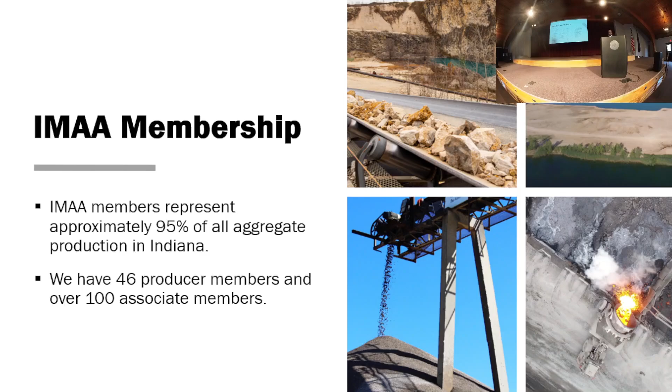We've had a good year in 2024. I've mentioned this previously this week that we had record attendance for everything that we did in 2024. Let's give yourselves a round of applause for that.

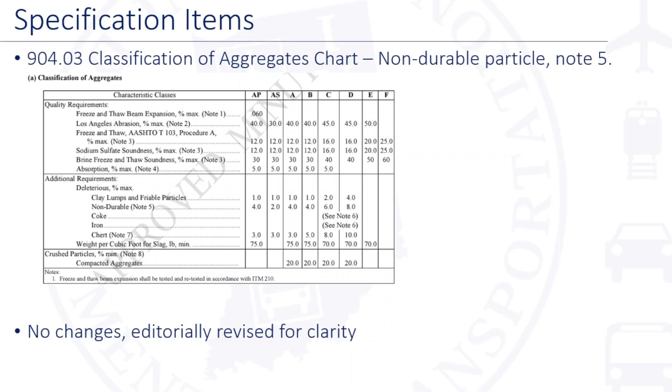On to some aggregate items. We made an editorial change to our classification of aggregates chart in 904.03. One of the notes, specifically note number 5, deals with non-durable particles. There was a long list of things in there, and we found there were different interpretations of this. In reviewing it, we thought breaking it up into A, B, and C would help clarify the intent. So that's the change we made there.

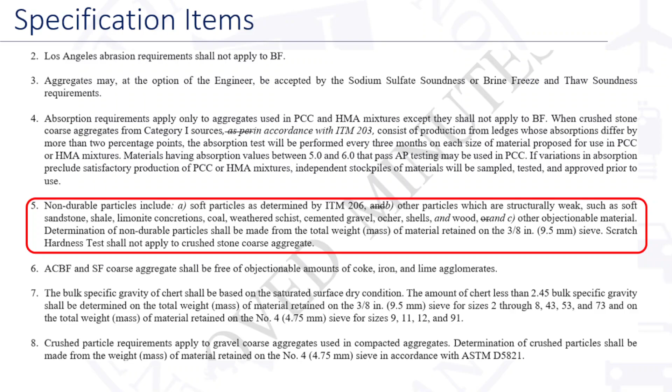That should be coming up here in September. INDOT is releasing a new standard specifications book that will apply to lettings September 1st of 2025 going forward, otherwise called the 2026 spec book. This change will certainly be in that spec book. I don't know if we made it a provision in the interim.

A couple other items here - like I said, we're going to bounce all over. Proof rolling, this was something our geotech department wanted to update, so they provided some clarification. That's in 203.26. I believe it has to do with the number of passes and stuff, but it's been a while since I looked at it, and geotech's not my background, so I just had to take their word for it.

Subgrade treatment - we used to have about 7 or 8 different types. We've looked at them, and geotech wanted to eliminate a few to reduce the number of options. So they eliminated 1D, 4, and 4A. Those were either seldomly used or very similar to other options being used. So these have been deleted.

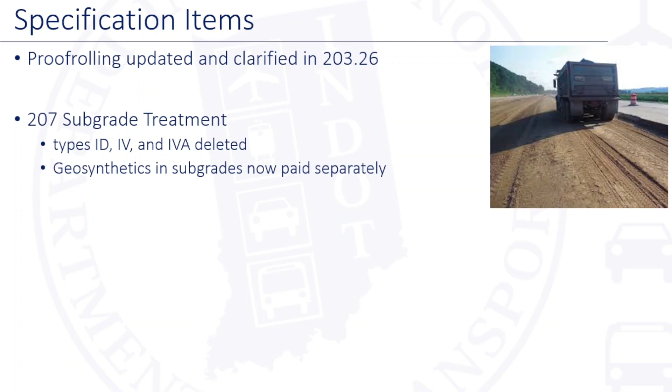Geosynthetics was something they also wanted to change up and now pay for that separately. It used to be included in the cost of the subgrade treatment when it was required. Now, when it's required, we'll go ahead and pay separately for it. So there should be pay items in those contracts that it applies to.

301 and 303, which is the aggregate base and aggregate pavement shoulder sections, had some additional details provided for aggregate compaction and construction, as well as clarification on moisture content. I think they want to shoot for between 4 and 7%, as opposed to running a bunch of proctors and getting optimal moisture and things like that.

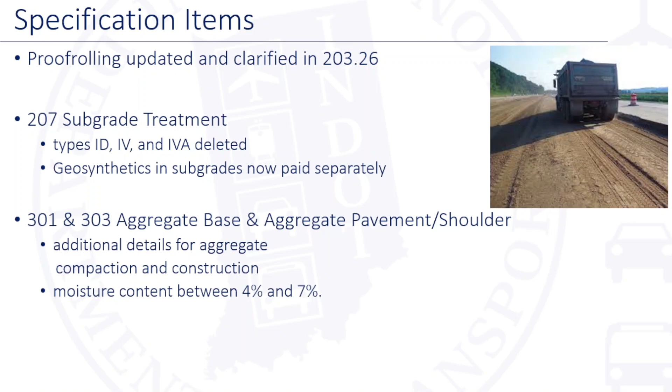Concrete pavement recycling and used as aggregate. This is something that's come up over the past couple of years. Various folks get inquiries from the public about general green type initiatives. Hey, what's the department doing? One of the ones we see a lot is, well, what about all this concrete pavement?

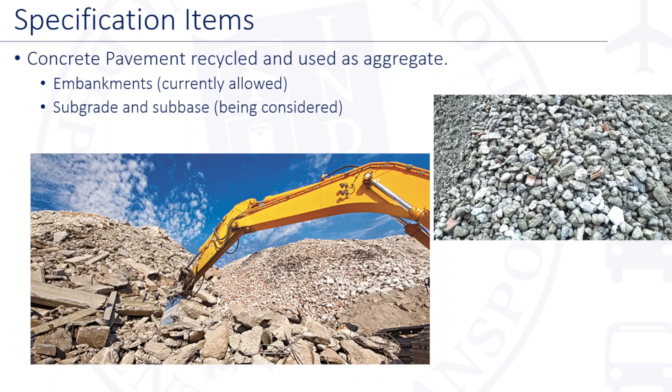INDOT has allowed it. The specifications currently allow it to be used in embankments. This would be below the level of your under drains, somewhere in the 203 section. We also have a small working committee looking at perhaps getting it into subgrade and subbase. Not sure there's a huge demand for this, but it's something we felt an obligation to look at, going forward with some of the different initiatives. We at least wanted to look at it and see if there's opportunity.

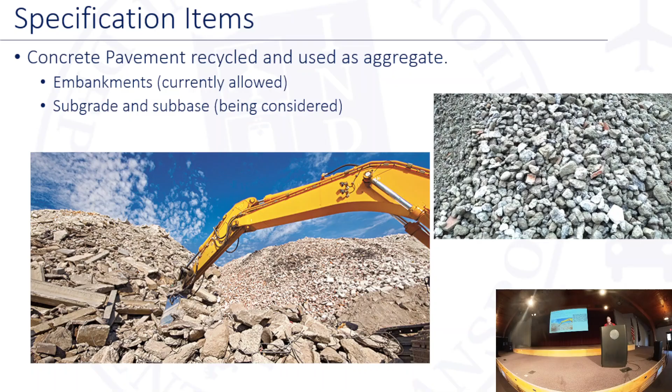So there is a group working on it. I'll admit it's not probably first on anyone's list of things to do, but we are meeting periodically and talking about it. So we may or may not end up getting it into subgrades and subbases, but it's at least being discussed.

Some of these rebar items now coming up, I'm going to try to move a little quicker since most of you don't deal with too much rebar. We did allow 706 as an addition. Rebar right now is in accordance with ASTM A615, that's your standard steel rebar. 706 is just a slightly different chemistry. We went ahead and added that as well, so coming forward here in the future, if there does happen to be some steel shortages, there's another option that contractors can look at to keep things moving.

706 is considered weldable. However, INDOT is not allowing welding on 706 rebar. All rebar, whether it's 615 or 706, still needs to be tied. But we do have a spec change that will allow either one of those to be used.

With various updates to the AASHTO design specifications, it was felt that 32 is not sufficient for all scenarios they're looking at, so it's now 64 bar diameters. But we really want the designers, they're aware of this, our design manual talks about it, it really needs to be shown on the plans. If it's shown on the plans, then that's what you do. If not, and there's no other guidance, then the fallback was always 32 bar diameters.

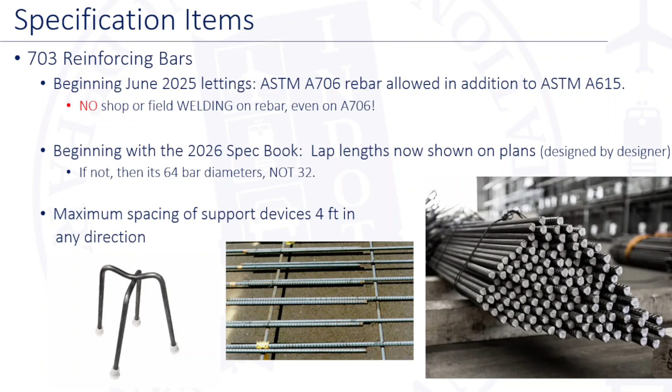Now it's 64. The maximum spacing of support devices we changed, again, this is coming up in September. In order to provide a little more rigidity and stiffness to the mats, support devices should be no more than 4 feet apart in any direction. So it may end up being a few more support devices used, but hopefully it gives us a little more rigidity to the mats. The steel will stay where it's supposed to, and we'll be able to maintain the clear covers to the top and the bottom like we're supposed to.

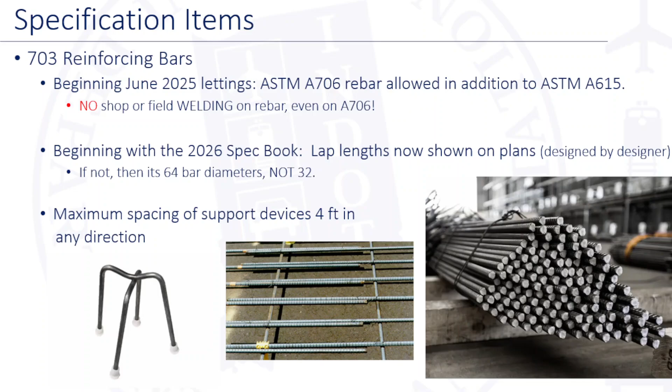MSE wall panels, this has been an issue that's come up here, unfortunately, more frequently the last couple of years. Specifications call for a couple of cores to be taken. Just want to make sure everybody knows these are 4-inch inside diameter, so the core itself needs to be 4 inches, not the core bit. If the core bit is 4 inches, the resulting core is something less, and that doesn't work when we go to do the compression testing on it.

Yes, we will get a value, but if it's real close to the minimum acceptable, and the core is a little smaller, you get a lot of uncertainty. Well, if it would have been the proper size, is this acceptable or not?

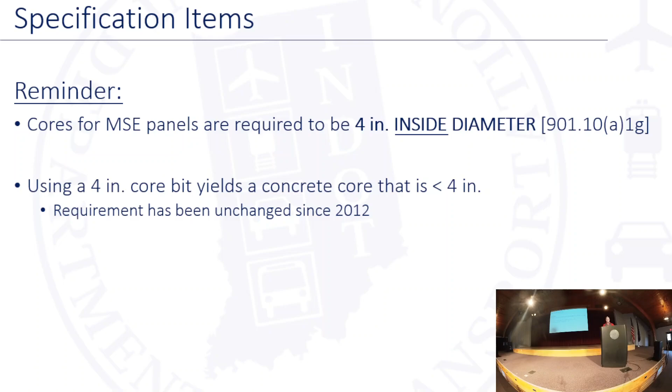So just want to emphasize, hey, it's 4-inch inside diameter, so that's probably equates to about a 4 1/4 core bit is what's needed for that. A few other spec items here.

738 are polymeric or epoxy bridge deck overlay. That's what's in the top picture there. Basically, it's slather some epoxy on a bridge deck, cast some aggregate in it, put another layer of epoxy, then another layer of aggregate. Our asset management teams, our bridge maintenance is using this a lot to try to help extend the life of bridges before we get into rigid overlays.

If you have one of these in your contract, I just encourage you, please read that provision. We've had about 7 different versions of this provision over the last 5 years, so even though you've done one a couple years ago, please read what's in your current contract, because there may be slight changes from the last one you did.

Box culverts, there's been a change, a new option. Sometimes waterproofing membrane will be required. If so, there will be a pay item in the contract. And what that entails, instead of like the picture shows, where they're basically just putting that wrap on the joints, it would be the entire structure gets wrapped.

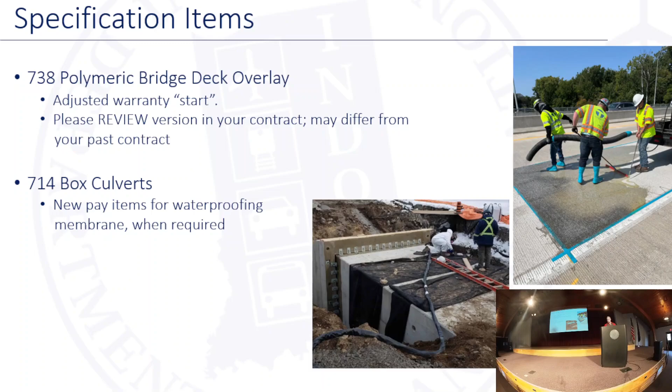Again, if this is required, some districts were requiring it, and there was just some inconsistency throughout the state. We went ahead and got a specification created on it just so we could have consistency throughout the state, as well as when it ends up being selected for use by design.

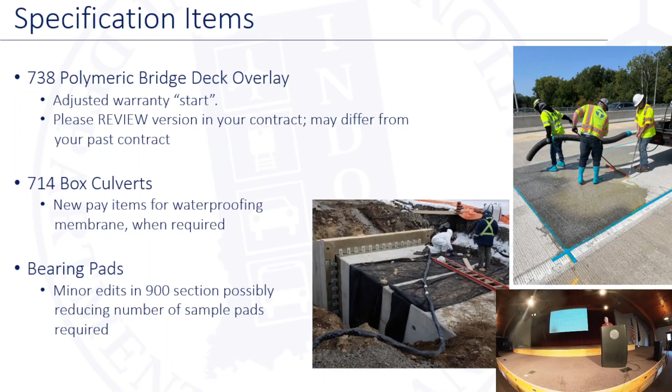Bearing pads, we'll skip over that one now in the interest of time. Basically, we made a change dealing with the number of samples we need, we made a slight tweak on that. So hopefully it may, in some cases, reduce the number of samples that the bearing manufacturer is required to send to INDOT.

Build America, Buy America has been a hot topic here in 2025. Those who may not be aware, the manufactured products waiver was terminated in the Federal Register January 14th. What this means is we've always had a certification that was required for steel and iron products. Steel and iron, you had to fill out certifications since probably about 1985 or thereabouts. Your steel and iron needed to be, I think, made, milled, manufactured within the United States. So that's always been there.

A few years ago with the IIJA bill, that came out and they added things called construction materials. So construction materials, they wanted also to be primarily manufactured in the United States, and they gave a list, optical glass, lumber, a handful of other things. So those were now requiring a certification as well.

Two years ago, for manufactured products, Federal Highway had a waiver for these. So if it was a manufactured product, well, that can be made wherever. Not anymore. Effective with our October letting, the manufactured products are also going to have to be some percentage of them made, manufactured in the United States, and there'll be a certification for that. There'll be some additional impacts coming up with the October '26 letting. I think it deals with the percentage of the components that need to actually be manufactured in the States, but there'll be more information forthcoming on that once we receive more information.

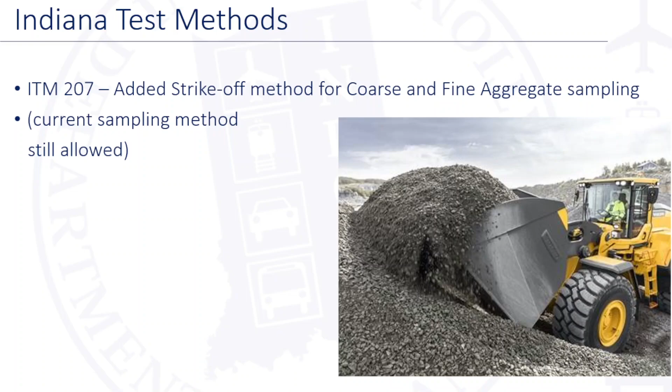Going on to Indiana test methods here real quick. I think I just have one of these in my presentation that we changed. ITM 207, we added a strike-off method for coarse and fine aggregate sampling. The current sampling method is still allowed, so with the addition of this, that gives everybody options. You can sample it in one of two ways.

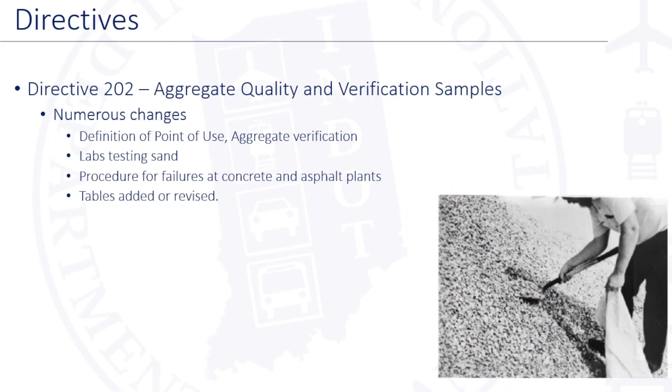And in Directive 202, aggregate quality and verification samples, we made some changes here. We understand there was some inconsistency with maybe how point of use and other things were taken. So we've tried to put some clarification and clean that up, as well as for labs testing sand. Tried to clean up and better define procedures when there's failures with aggregate at concrete and asphalt plants, as far as going back to the source and things like that. So Directive 202 has a fair number of changes here that we hope are going to be some clarification for consistency there. And that brings me to the end of my presentation here.

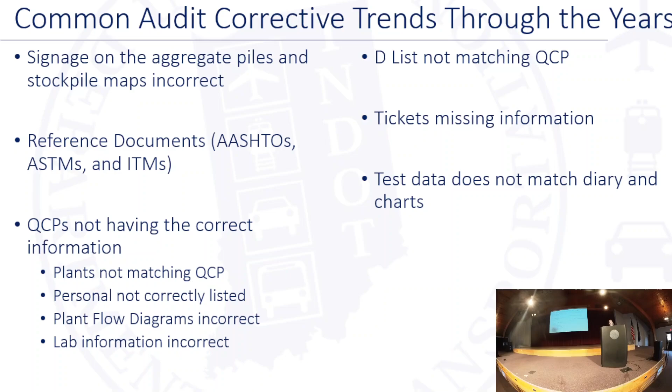5-point moving average trend not noted in the diary or the math was incorrect. With your programs, once in a while your 5-point moving average is not a 5-point moving average, it's actually like a 3-point moving average. So when you guys do your charts, you want to make sure it's a 5-point moving average. We also noticed that the trends 7 up, 7 down are not being noted in the diaries as well.

Missing deleterious tests or frequencies. Again, that's a big one that we've been seeing. I do know some of the programs, like Stonemont, Windrock, if you have a 0 on your deleterious, it does not report it. So you want to make sure when you do your test that it gets reported. Missing startup, normal, and loadout frequencies. Yes, we all know we're human, we miss our frequencies, but we've been seeing that.

Key personnel changes not in diary. Again, if you had a boss that decided to leave or you had a tech leave, just note it in your diaries. Compliance rates being below 95% or standard deviation above 5.0. Again, this is one of the bigger ones that we do see once in a while, and that actually hurts you just as much, because if you have 95% or below, we will commercialize your stockpiles, so you lose a lot of money in that part for being state.

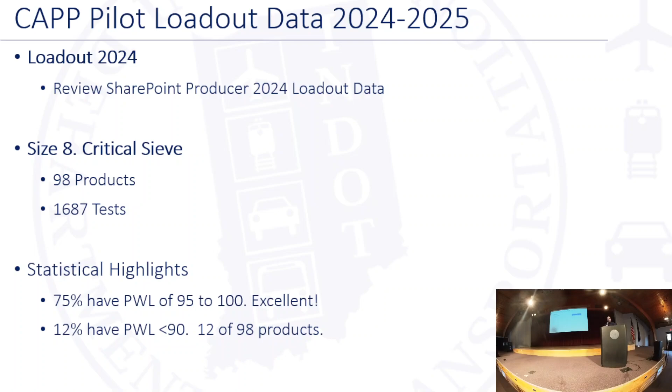What we really want to focus on, and I think what we learned through this, is a lot of products, a lot of producers are already hitting what we're asking for, and we want to talk about the ones that are below that line, and that's really what we're going to focus on, is what can we do to get those ones that are below that line up above that line, and how can we do that?

So those are a lot of things I already said. We found the data entry time hopefully was not a burden on folks that did that, so I want to thank everybody for doing that in our SharePoint spreadsheets.

Real quickly, I have the size 11. Pretty similar, a little better. I think all of you would agree 11s are probably a little easier to handle and keep in grade just by the nature of the size. We had 62 of those, and I think a little under 1,000 tests, but again, pretty similar to what we found. So those are just the statistical highlights. I'll jump past it. So what do we want to do?

So we've been meeting with a small group, and again, Calvin mentioned earlier the partnership we have. I want to say thank you to the aggregate industry for meeting with us and talking about these things. And we're all talking about where we want to go, and I think we're going to go there together. So what do we want to do?